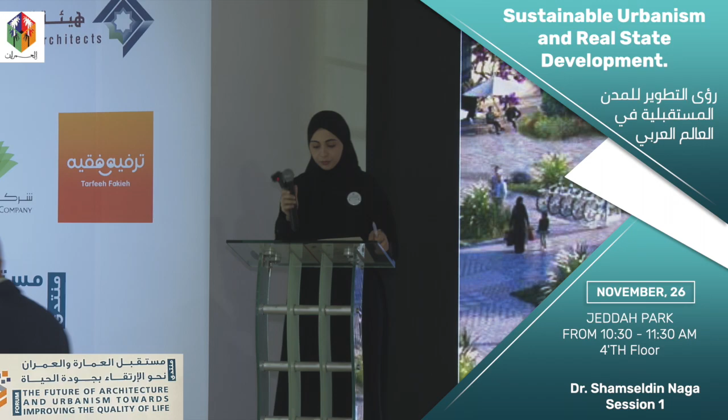The presentation today will be mixed between Arabic and English. I have seen some people that are not Arabic speaking, so I'll try and mix between both. The presentation is focusing on the vision of 2030 by creating a vibrant society where we strengthen Islamic and national identity and also offer a fulfilling and healthy life.

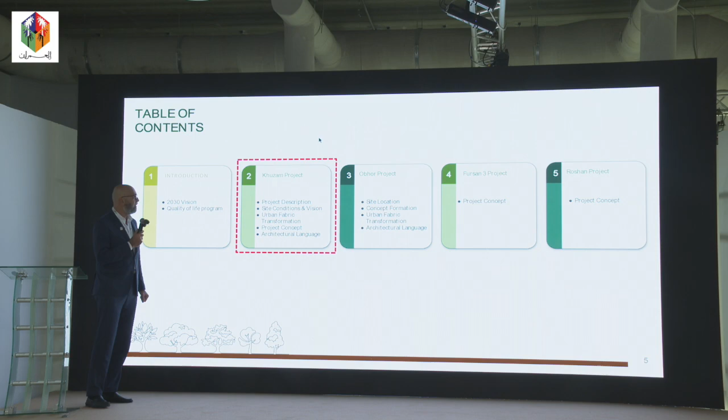The first project we will be showing would be one project in Al-Khuzam, which again shows the vision of 2030, improving quality of life and integrating livability and lifestyle. I will show 4 projects today: the first will be Khuzam project, second will be Obhor, the third will be Fursan also in Riyadh, and the Roshan project.

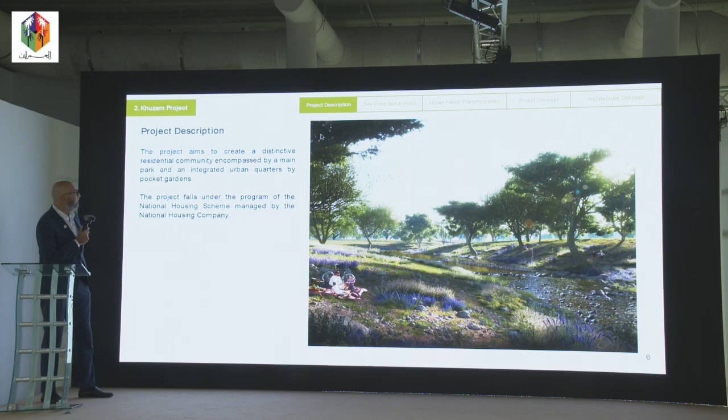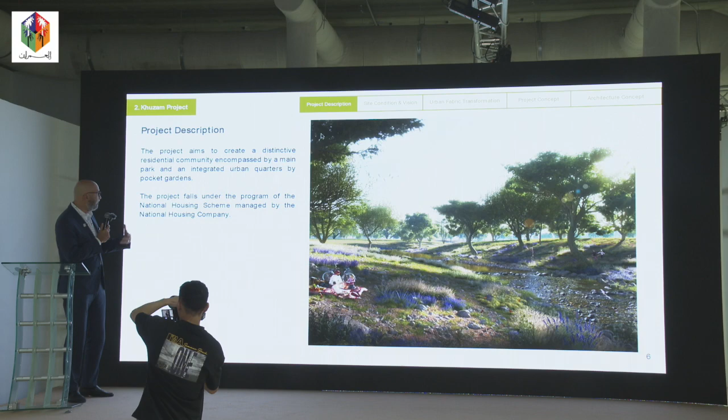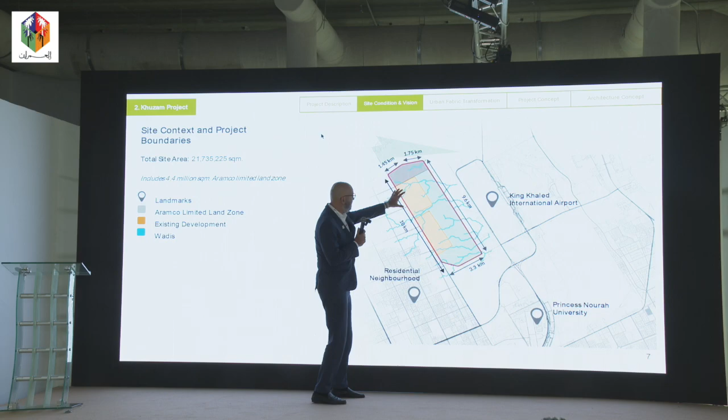For Khuzam, the project was intended to create a distinctive residential community to encompass a main park, which was by a royal decree to have a central park. We'll share that in a second, which will fall to introduce all of the national housing within that. The site is about 10 kilometers in length. Existing are these developments which were already on site, and we'll talk about the connection. There was a royal decree to make one continuous park throughout the site.

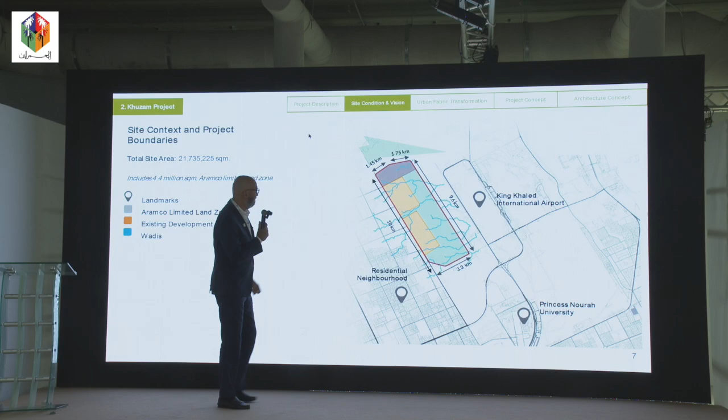So what we looked at now, these are the existing developments. There was a vision to connect, from the royal decree, a park. We looked at it holistically, and we realized that it should be not only one connection, but connecting the whole loop, closing the loop basically.

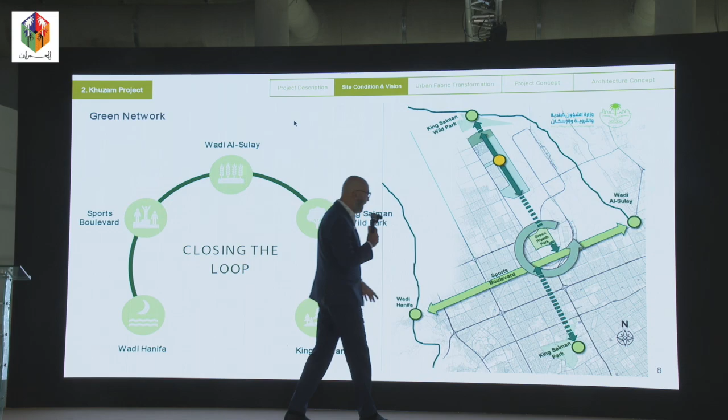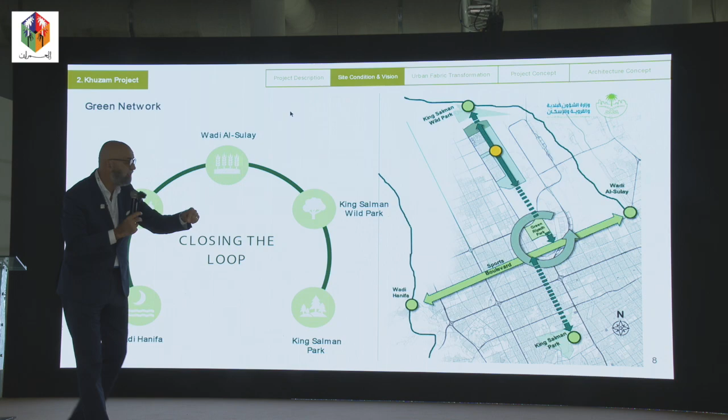You have a sports boulevard on one side, you have Wadi Sulay from one side, and from the other side, you have Wadi Hanifa. What we connected, we thought this could connect to King Salman's Wild Park, and then further down into Sports Boulevard, connecting to King Salman Park. So what we looked at is not only our project, but how to connect the whole city together through our project.

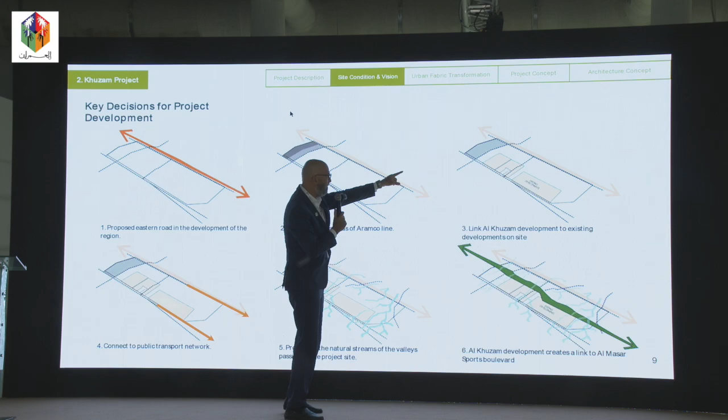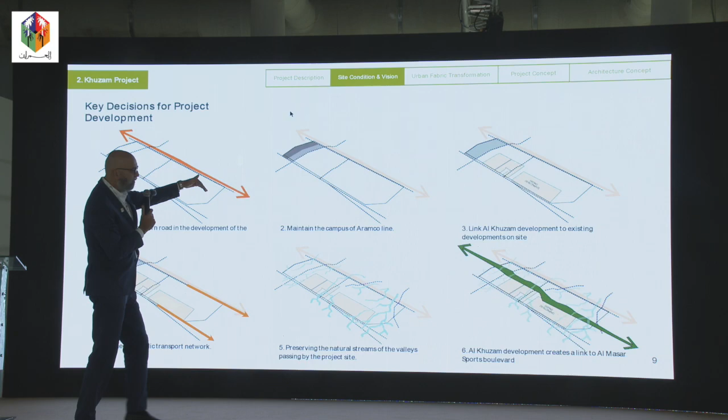Basically, the beginning of the project was that there is already a street on the east. This area was maintained by Aramco lines, so there was no build zone into this area. We had the development on both sides, shown in this yellow or light color. There are already wadis cutting into the site east-west, and we are going to be connecting a park running through the site north-south.

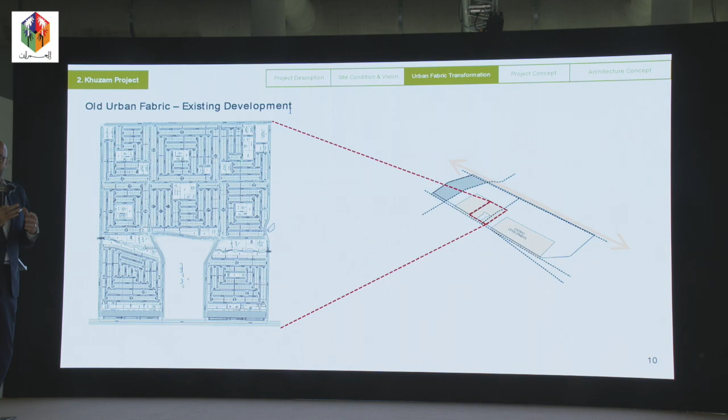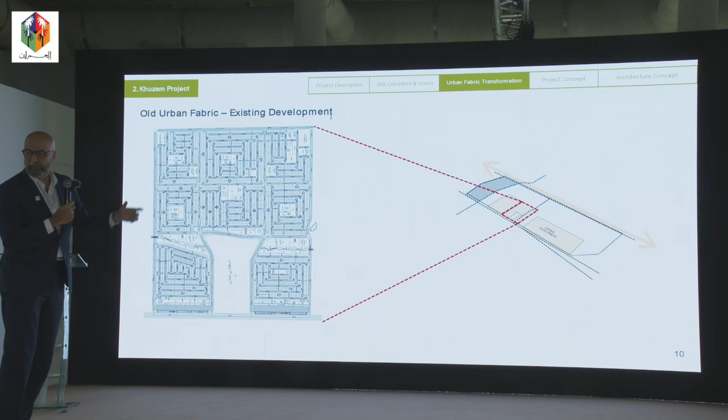This has been the typical layout of the mafruka, or the same layouts happening in Riyadh: 1 kilometer by 1 kilometer, with the center where the mosque is, and all of the streets intersecting, which does not create a continuous life or connection between these different neighborhoods. That was the situation when we came on board; there was already another master plan for the rest of the land, which was not yet approved. So what we thought of is how do we change that?

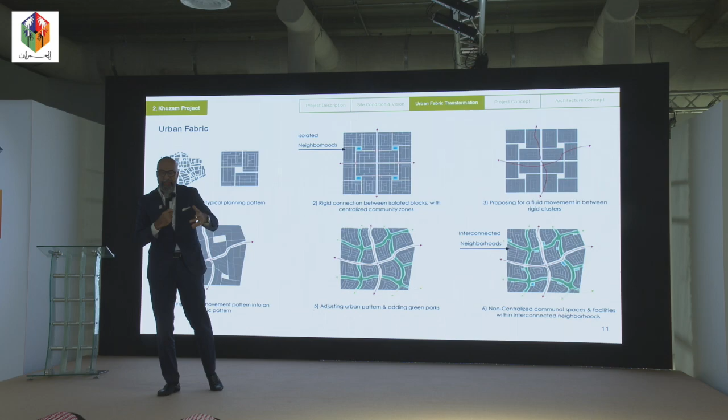Looking at the old Riyadh, Diriyah, and the layout of that, and when this started to become the main layout of the neighborhood - instead of creating these isolated neighborhoods, we thought, why not start to create this a bit more organic in nature, tying into what we already have in the old cities of Riyadh, creating something more dynamic and connecting all of the spaces to become more livable. So instead of one mosque being the center of each neighborhood, why not connect the whole thing so that from one point you can walk or cycle and get that kind of livability into the city.

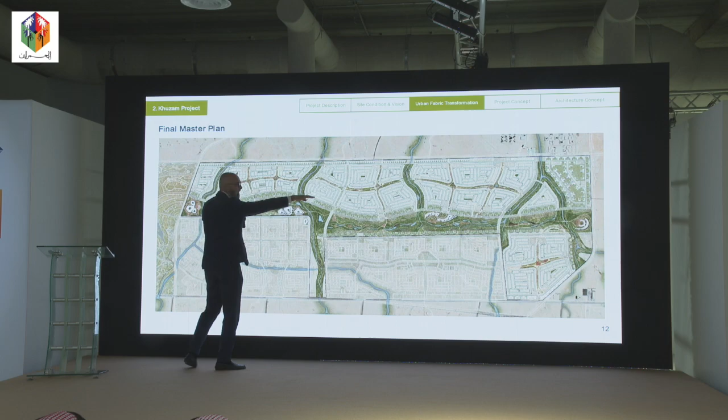So this is what we already inherited, and this is what we were then proposing as a new vision for the new development. The park was then made continuous, which we propose will connect further north and south to the Sports Boulevard, and the wadis are already there. Connecting to the wadis, we created a bit more of this dynamic road, putting apartment buildings onto there.

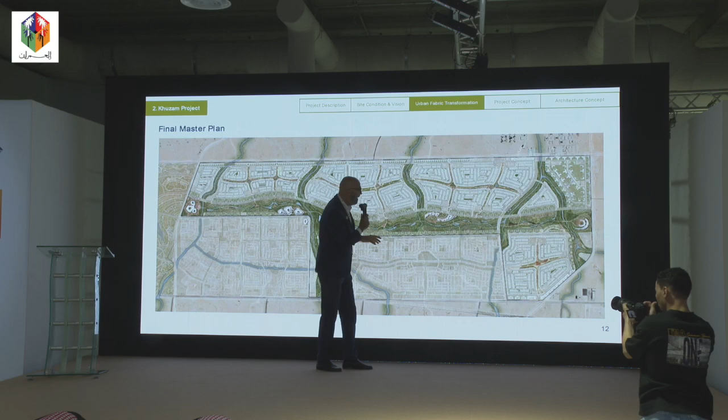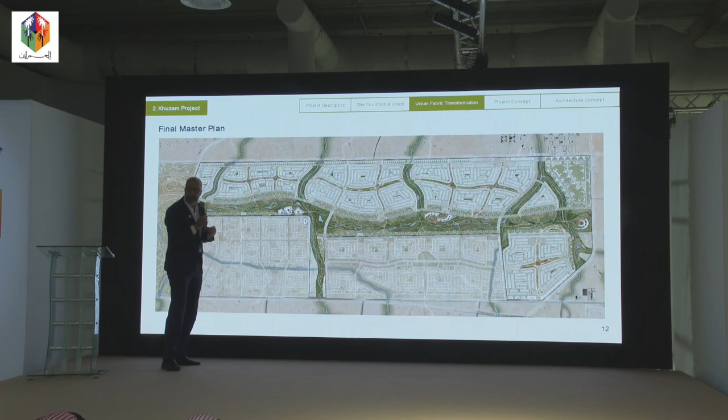Because this is about 10 kilometers in length, we thought the park would be too big. On one edge, it also has a very strong edge because of the existing development. So we inserted 4 nodes, each with a different definition, which interrupts the park, creating something more interactive so you don't get that very linear park as one.

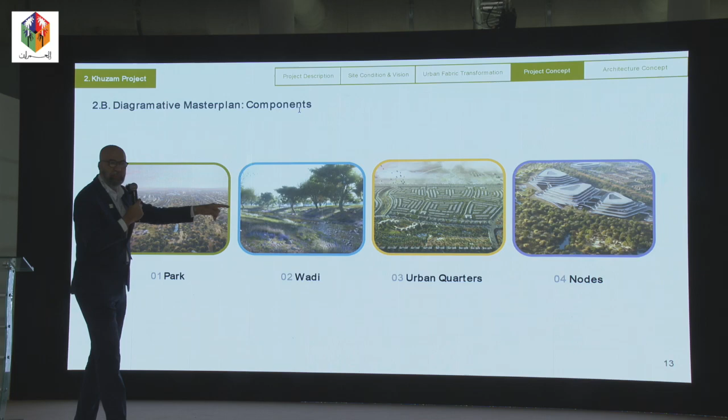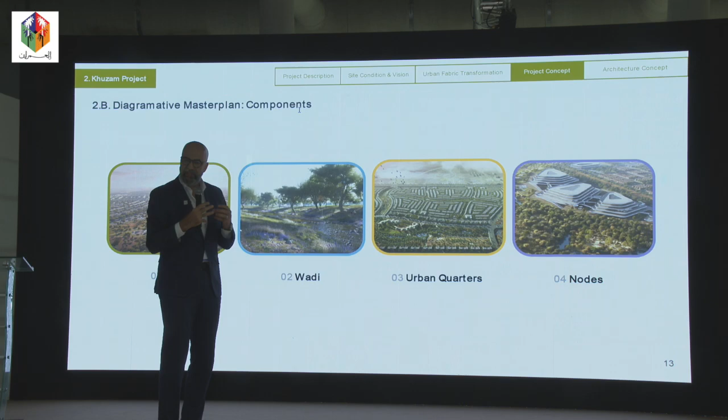These were then the main components of the plan: the central park, which again was by royal decree; natural wadis cutting through; the urban quarters in the new development; and these nodes - while everything was supposed to be in the Najdi or Salmani style, the nodes we thought could be iconic, something that can stand out within the park.

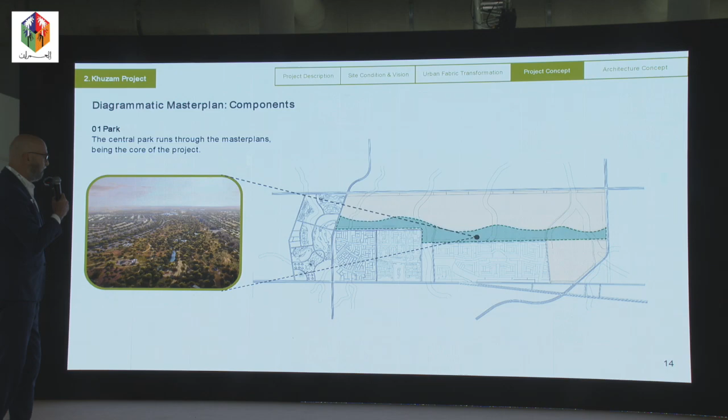So this is the first component, which is the park. This is an overview of the park. On the edges of the park, the apartment buildings step down to the park, providing terraces so everyone can view that center park, which becomes a main focal point for the city.

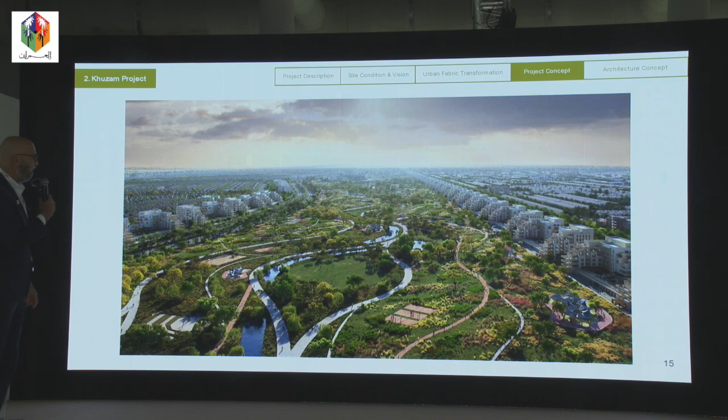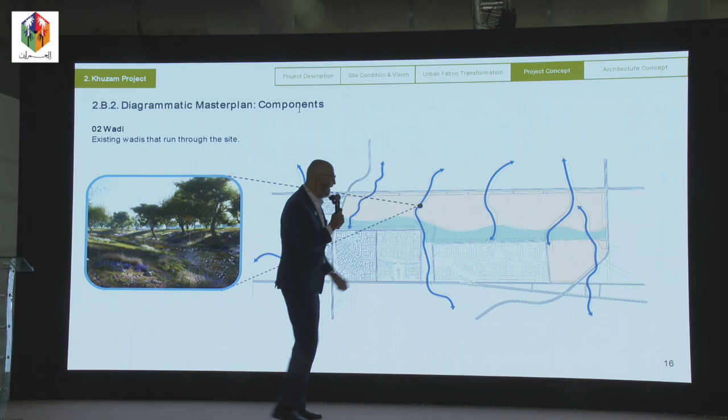The wadis were natural, already cutting into smaller parcels. These were respected, and we developed them in a more natural manner. These were the visions of how the wadis would work.

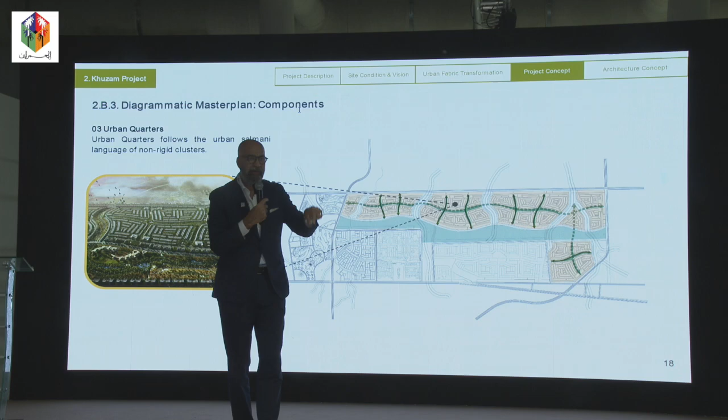For the urban quarters, since they'd already been cut by these wadis, we created a very organic nature connecting all of them, and from any point you can be 5 minutes into the center park. So the idea is not isolated islands anymore, but anywhere you can get by bicycle or walking within 5 minutes to your park, creating a livable city.

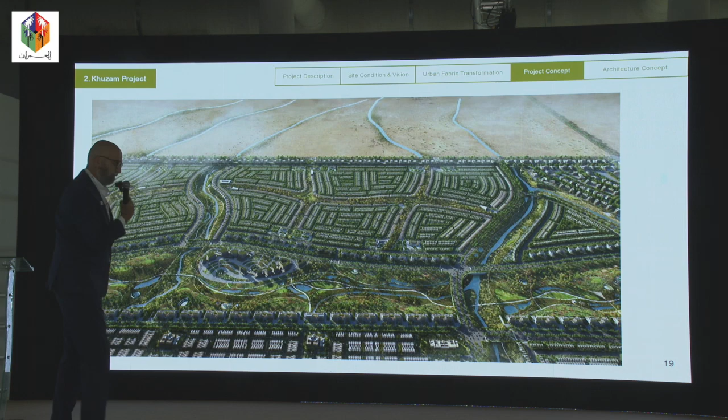So this then became the vision, with all of these nodes developing within that central park. The nodes were created with 4 different identities.

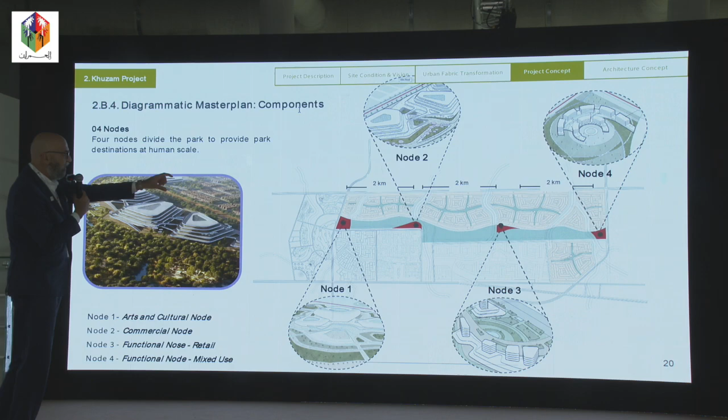The first node is an arts and cultural node. The second was a commercial node. The third was a functional retail one. And the last, closer to the airport, was intended to be mixed use with hotels, serving the airport.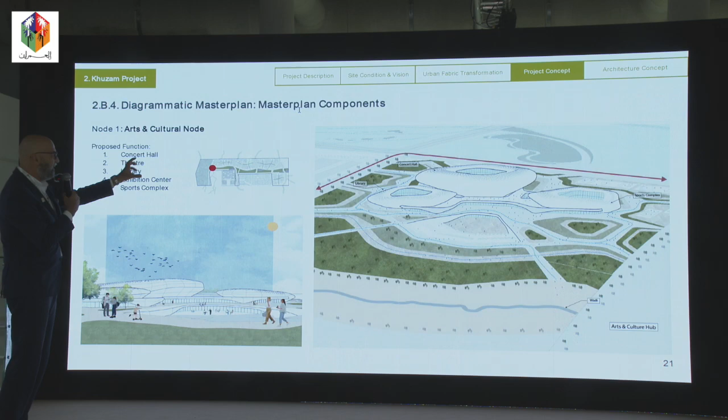So the first node had a concert hall, a theater, a library, an exhibition center. This is a very basic vision of what that can be.

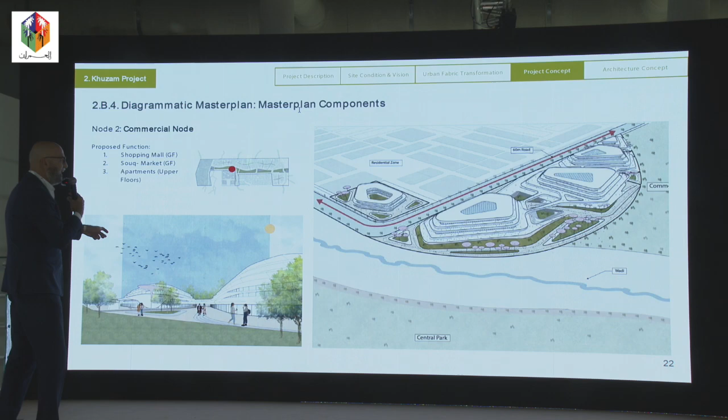The second node is a commercial node, a mix between commercial activities, malls, and also some smaller residential apartments just to activate these spaces.

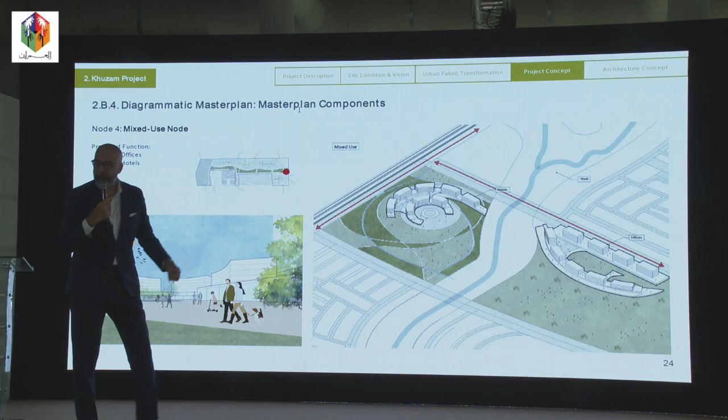The last one is mixed use, with hotels and some offices at the very end, closer to the airport, serving that area. These are some of the renderings.

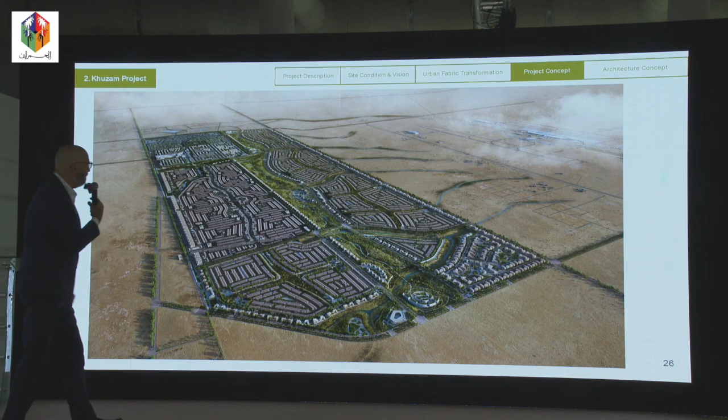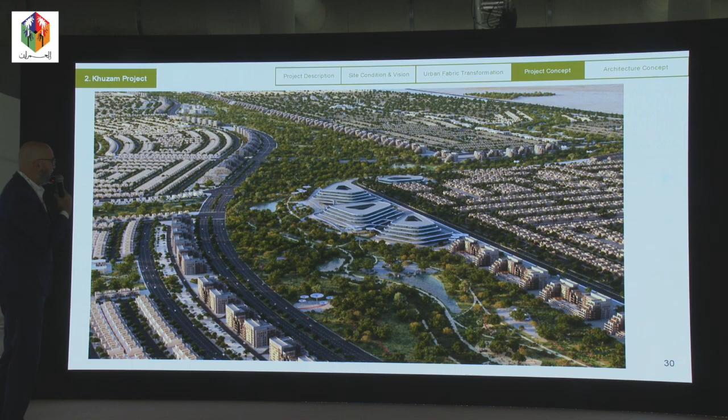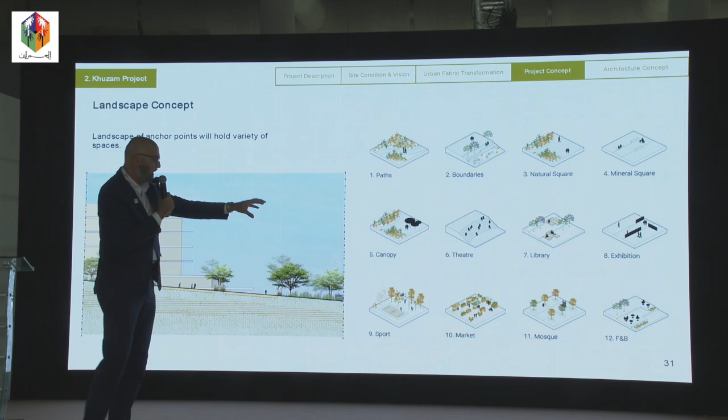These are the different nodes. What we did in the park is develop each different experience within it. We looked at about 12 different experiences: paths, boundaries, natural squares, mineral squares, canopies, theaters, library and workspace, exhibition, sports, market, mosque, and F&B. So within the park, it's not just one park, but each area has its own definition.

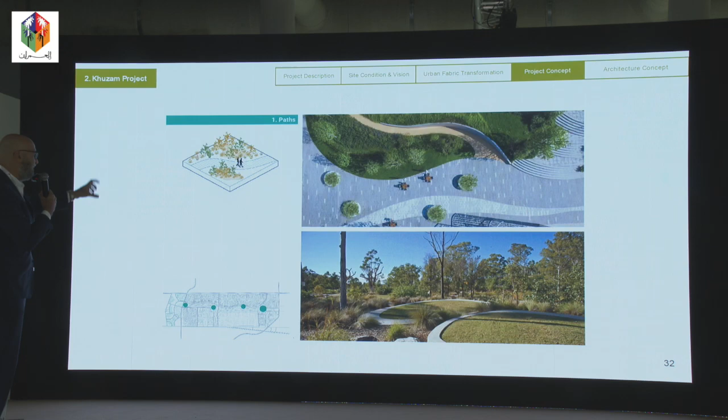I'll run through them quickly. These are the paths, defined within the nature, with some references and renderings we created.

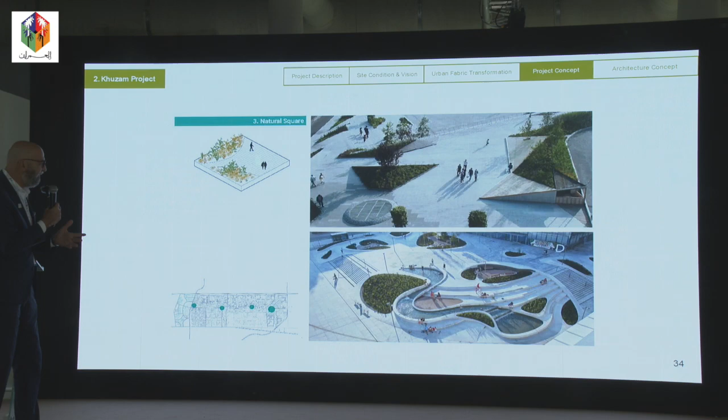These were the natural squares, areas that people can meet and have spaces to activate and work, whether using different slopes or flat areas, each well defined in its own way.

Mineral squares are spaces that aren't necessarily very green, but open spaces for people to gather.

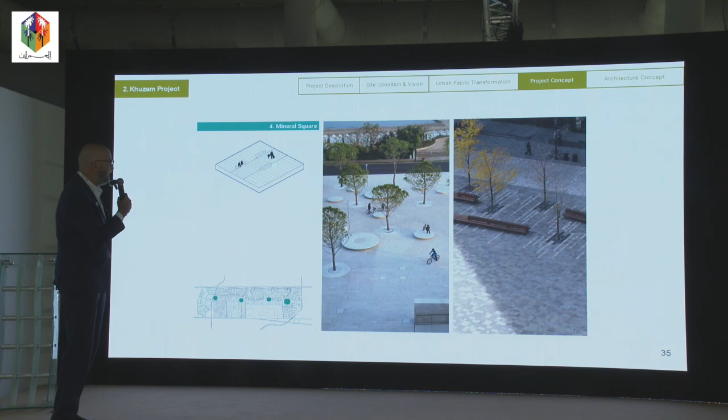These were canopies, and we're still in a very hot country. We need shade. The moment you have shade, you can allow spaces for people to sit down and work and experience the outdoors.

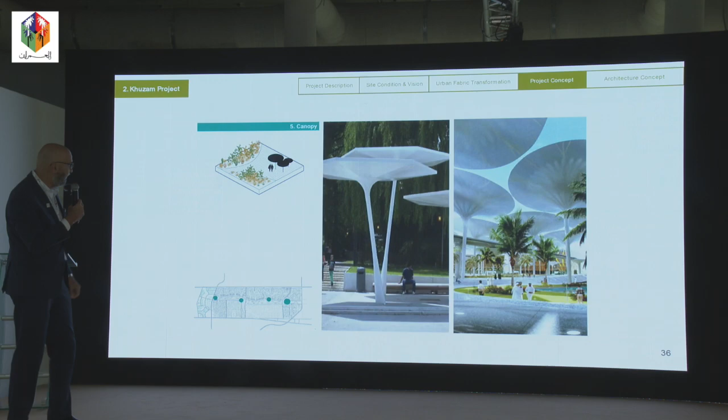The theaters use a little bit of slope on the side. What if we create natural theaters, where people can sit down and activate these steps at different times?

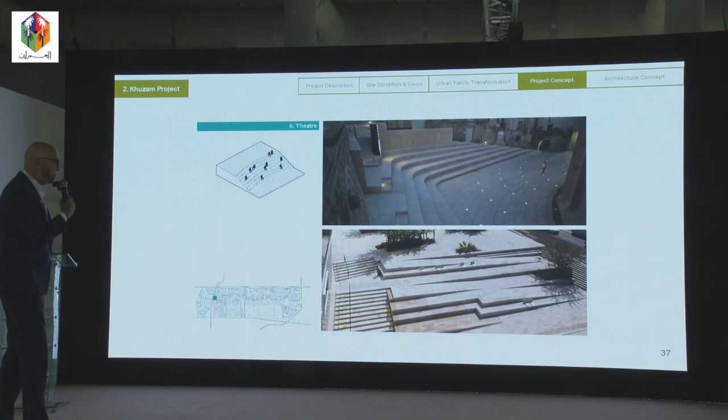Also areas for people to work. After COVID, people don't necessarily need to work in offices—there can be areas for people to work outside.

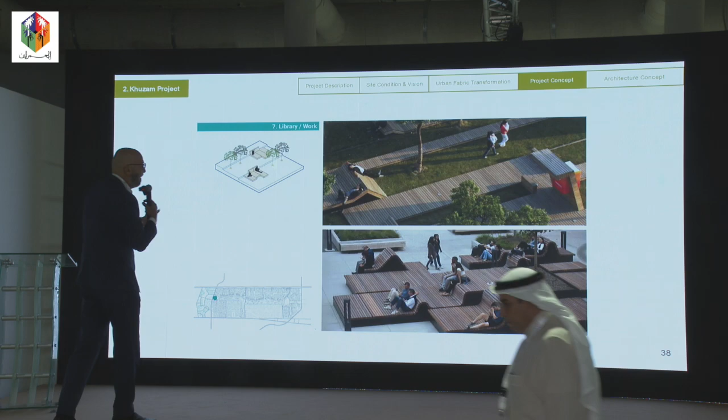There can be spaces to sit down and read a book, activating these spaces as reading areas, not just as a library, but as a park. It can also act as exhibition centers.

Public spaces can be used for exhibitions.

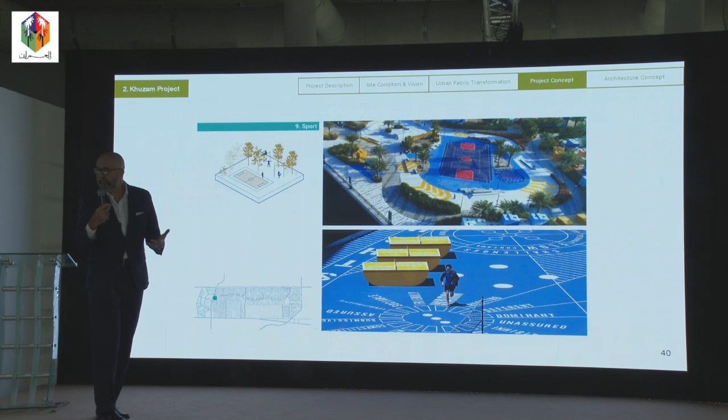And sports—there are a lot of open areas within the park activated for people to use for sports activities, whether open areas for running or actual basketball and volleyball courts.

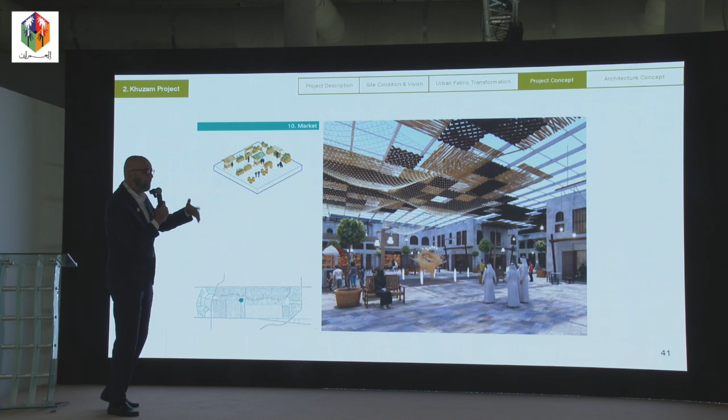Market areas. Within the extended areas, providing shaded spaces in certain areas can create open market spaces. Mosques and tree lines, and outdoor F&B as an extension.

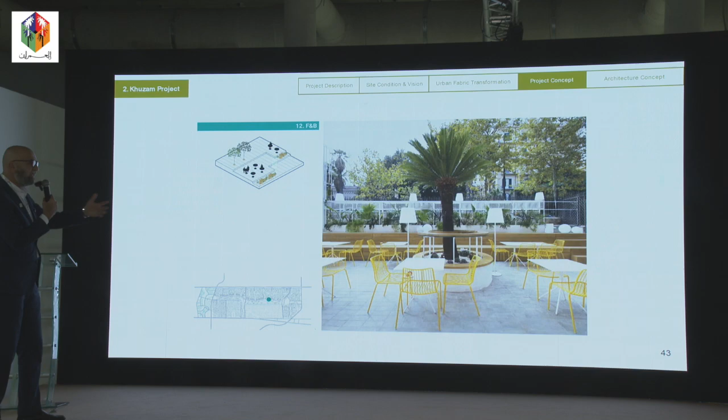What we looked into as an ideology for the Khuzam project was three important things: first, respect the natural environment; second, respect social values; and third, respect regional identity. By regional identity, we don't mean exactly copying the architecture, but understanding the language and how to implement that in the new architecture.

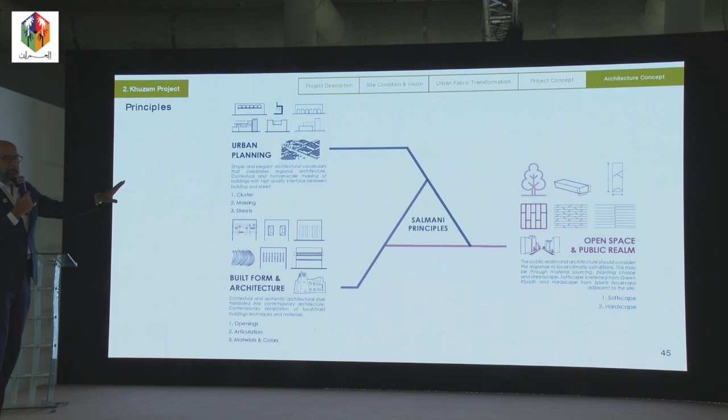So what we looked at for Salmani architecture, we examined three components. We evaluated it in terms of urban planning, the built environment, and open spaces and public realm.

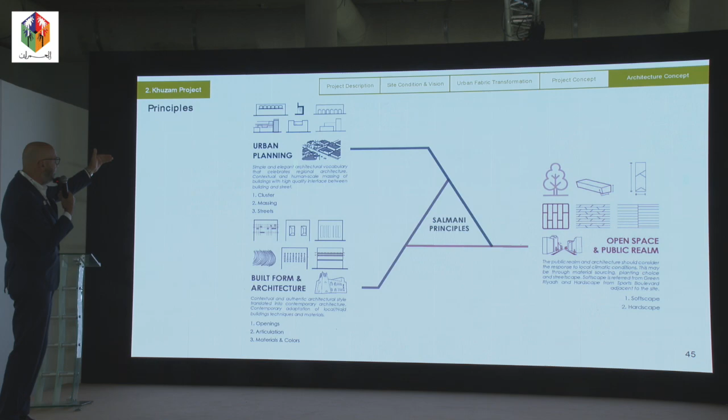For urban planning, we looked at the cluster, massing, and the streets. For architecture, we looked at the openings, the articulation, and the materials and colors. For open spaces, it was intended to look at the softscape and the hardscape.

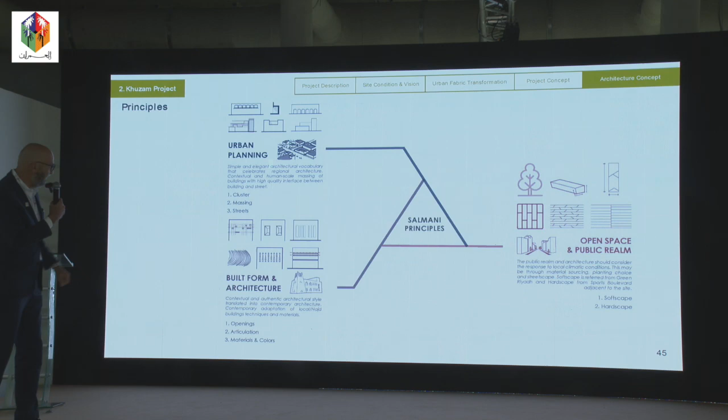I'm not going to go through this in full detail, just give you glimpses. So what we did was propose some architecture, and we did not necessarily say copy that. These are intended for developers.

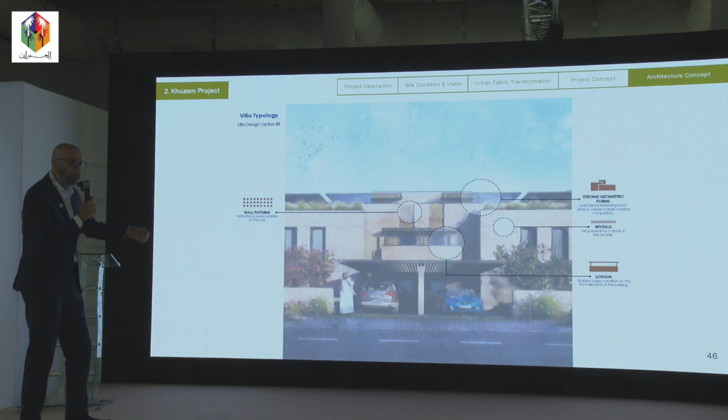We said, we want you to study wall patterns. You don't have to follow that, but do something. So if you go back one.

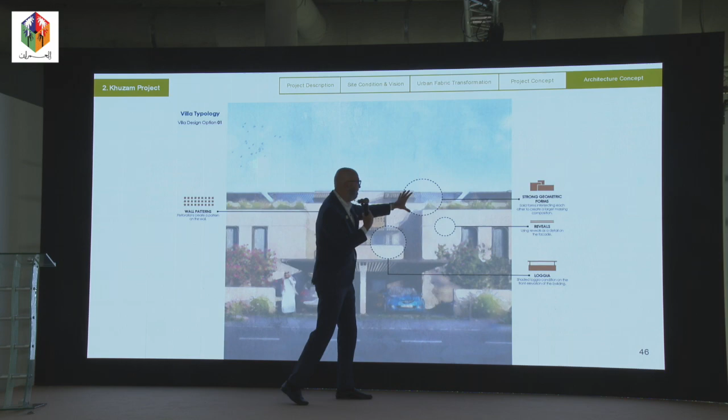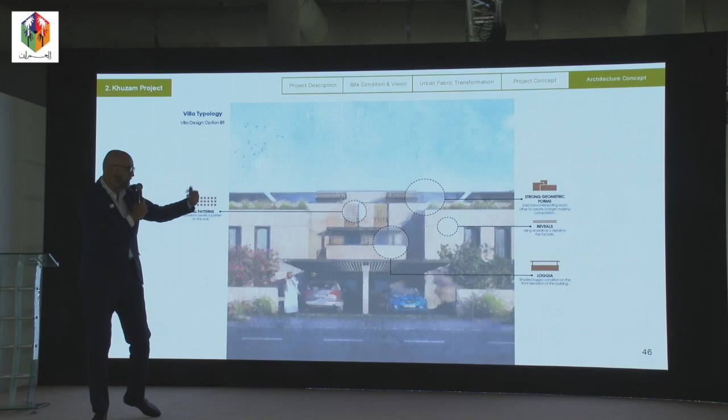Although we provided some references, we said you need to look at strong geometrical forms, reveals, create some loggias, and create some wall patterns. We provided a reference, but it's only there for guidance.

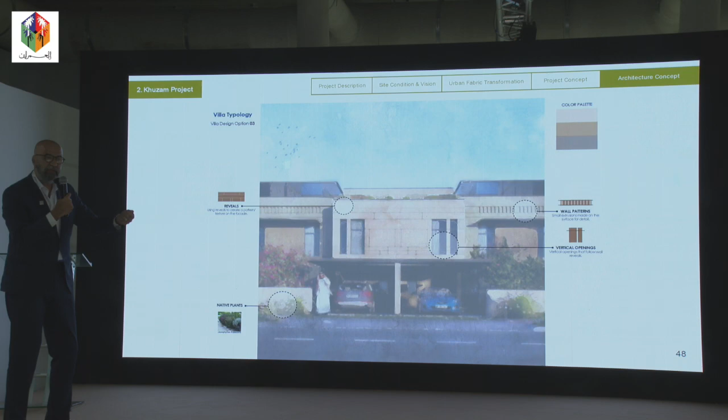This is somewhat what we expect people to produce. Similarly, this has been done for all of the Salmani style, provided to developers, contractors, and people working on site: follow this, but don't use it specifically as is. Use vertical openings, use this order. This was a direction to help them create that open space.

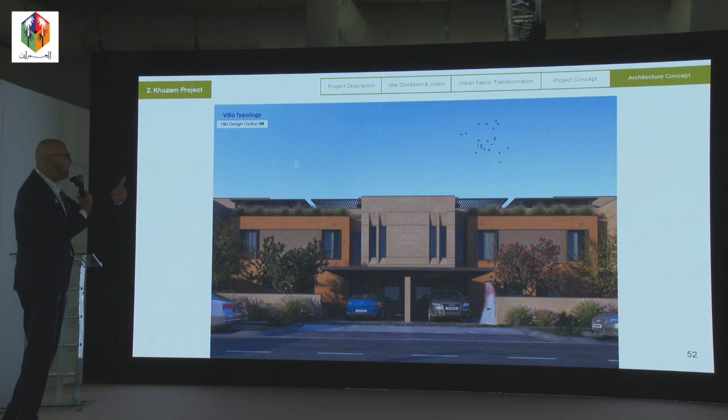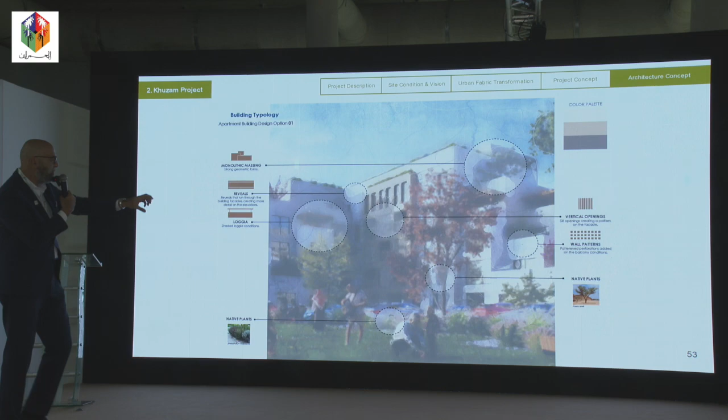This has been done looking into the right colors. This is also done for apartment buildings, how to meet the park, using the reveals, monolithic massing, the loggias, using native plants, wall patterns, vertical openings, and the color palette that works with that.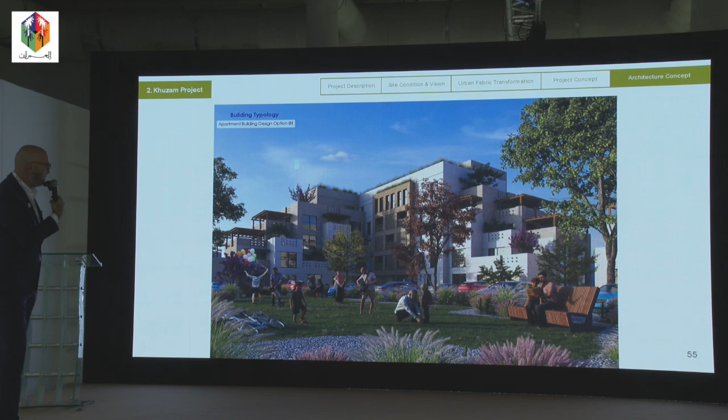That was then what we proposed for the city. This is a view from these apartment buildings into the park, and some of them would be directly on the water park, some with commercial below.

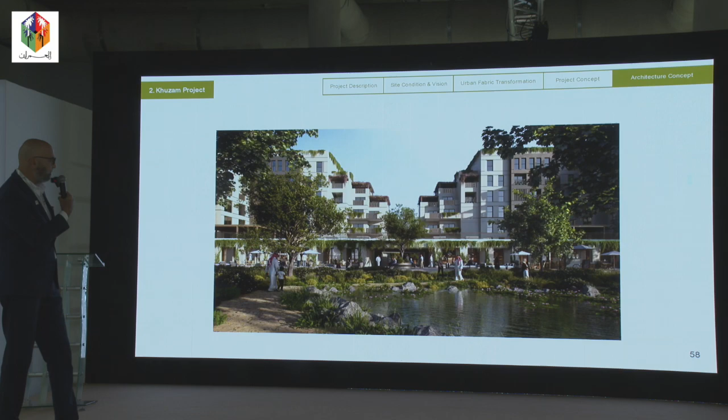If I can run this video—this is a very short video for a couple of minutes, so you can get a sense of what this looks like. All right, so it's a nice video, I'll share it with you later.

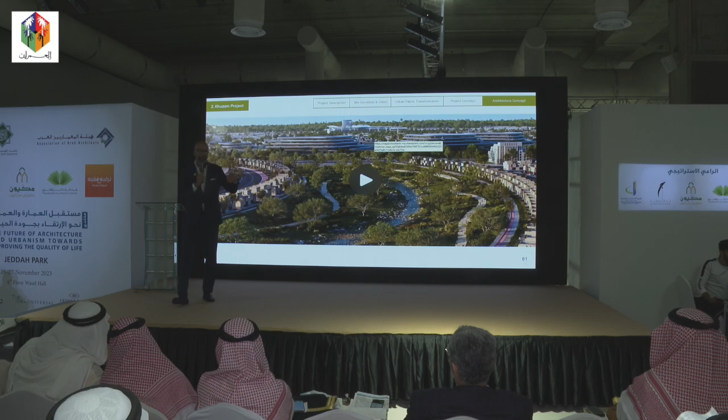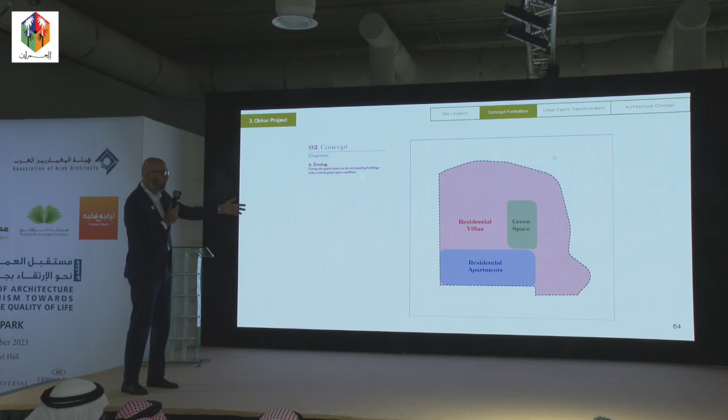Okay, next. Quickly, I'll run through Obhor as a quick reference. The same thing has been done on Obhor—this was another project. It was designed in a particular way, and then we came on to creating a continuous open space with residential apartments and villas.

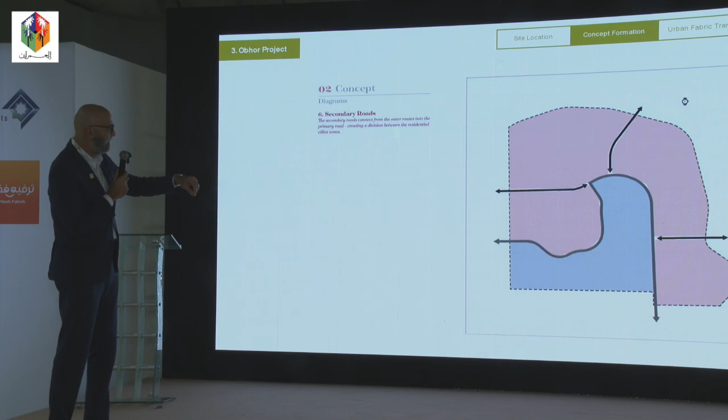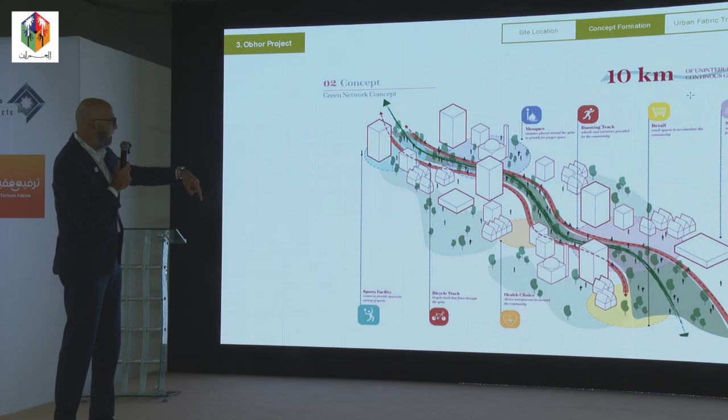This was the vision. Connectivity—this is how we proposed it versus this. This is how we looked at the overall massing, the center of green spaces. This is a wraparound, showing how one could create a 10 kilometer walkway.

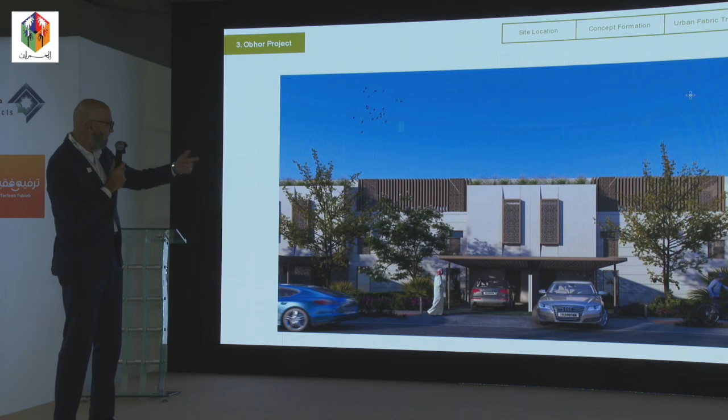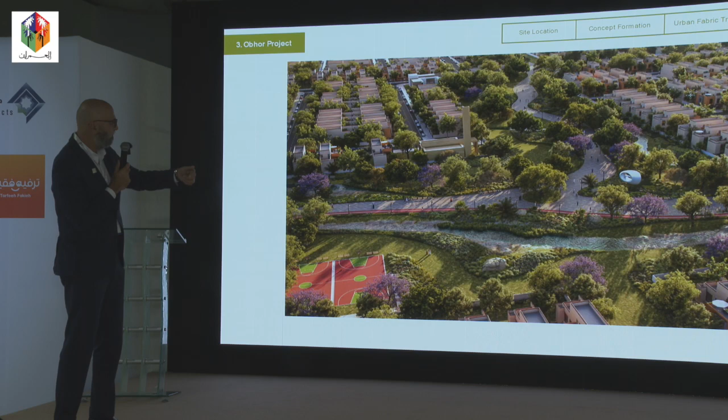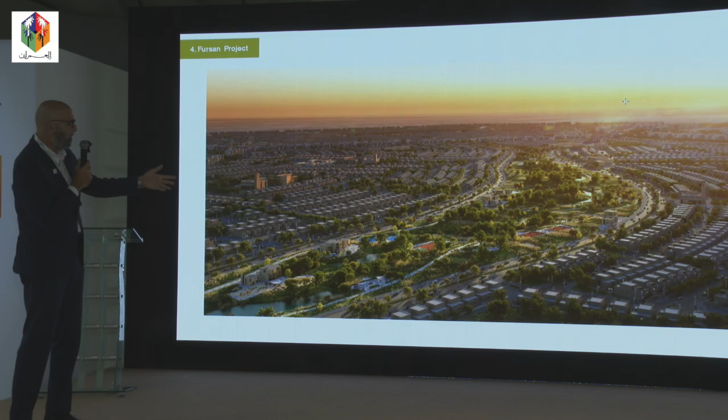Last one is the Fursan project, also about 20 million square meters. The same development has been interpreted on how to tie into this life of openness within the city. These master plans are now being implemented in most of the projects by NHC.

The last project is for Roshn. Over here again, the same idea has been implemented, tying into the whole project to connect urban spaces. They are all apartment buildings, but the goal is to create an old city-like feel, with these buildings working together to create a vibrant, city-like atmosphere.

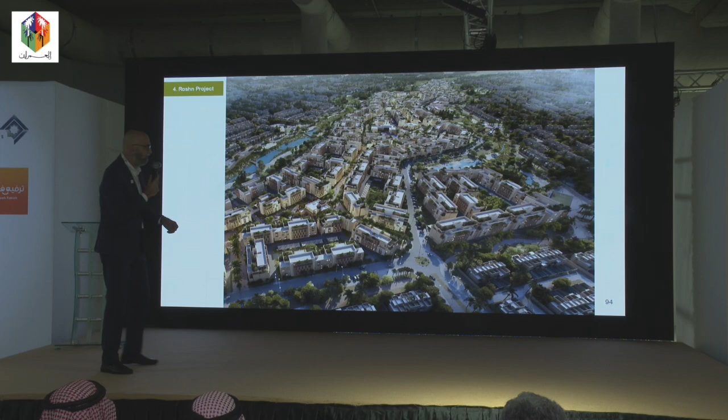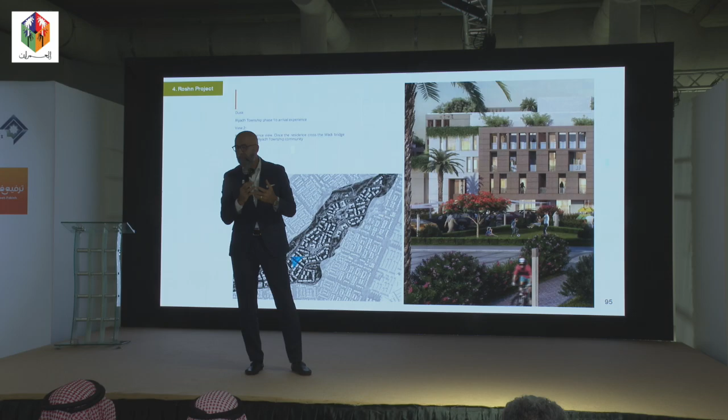That concludes the presentation, in the sense of how we wanted to integrate a vibrant lifestyle within the city, not necessarily creating small islands, but rather integrating architecture with nature and making the city more livable and walkable. Thank you very much.